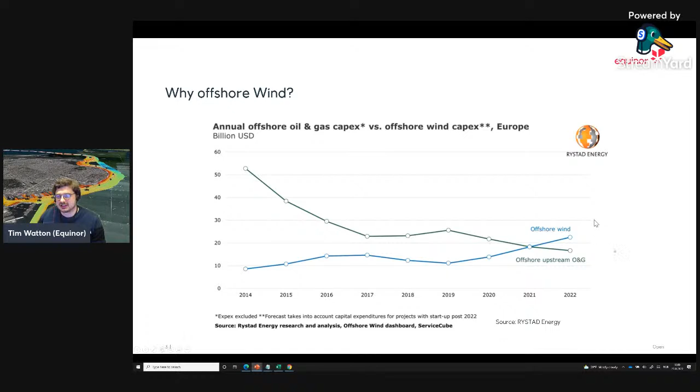So this is the starting point of the talk - starting to see this big increase in offshore wind activity and this big change in investment levels. Equinor's ambitions in all of this, these are all on our website: our ambition by 2030 is to have installed 12 to 16 gigawatts of offshore wind. That is a large amount, and I'll get to why in the rest of the talk.

It also reflects our ambitions towards CO2 sequestration and storage, and shows how we're investing a lot of our R&D expenditure into low carbon, energy efficient resources. I won't speak too much more about the strategic ambition of Equinor - there's a lot to find on our web pages and in the public domain, but I think this is a really strong and very ambitious target, and I can maybe explain why.

I want to make a quick comment on offshore wind in Norway, as this is the theme of this talk in a way. This was actually published in 2011, I believe, and it's evolving at the moment. Offshore wind in Norway is coming - it's a bit behind a few other countries at the moment, but it is coming, and this is on our website. We're teaming up with external and other companies to look at these interesting areas, and there's a lot of focus on this offshore in Norway. It's a little bit behind other parts of the world, but I have quite a few colleagues working on this.

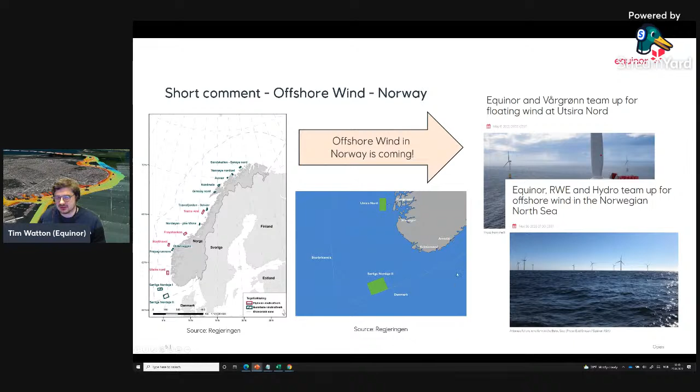Just to remind everyone of the difference between oil and gas and what we're looking at here—this is a very famous image of the Horns Rev wind farm by Ørsted. It's trying to remind people that the main resource here is wind. Wind energy is the primary driver for this, and it dictates lots of things about the wind farm. Unlike oil and gas, a lot of oil and gas companies are looking into wind, but there is a big difference.

The resource is not in the ground, and it's not optimized from the ground. The wind resource is the key driver for everything, and the placement of wind turbines, the selection of wind turbine sites—it's all around this.

This dictates the economics. And it's showing a few nice images of what's called the wake effect for offshore wind—this is where turbines interact with neighboring turbines to reduce the entire energy yield of the site. But this can be mitigated somewhat by different planning, or it's something you need to factor into your cost estimates for a site.

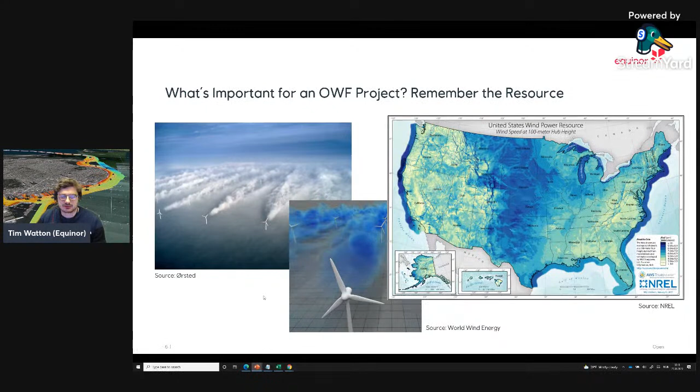So I just want to go through the anatomy of a wind farm. This is probably very basic for people on the call, but maybe good to recap. This is taken from our publicly released information on Empire Wind, the big wind farm in the US that Equinor are developing at the moment with our partners BP. Just using this as an example.

We can split a wind farm into core areas. One is the lease area, and then the development area within this, where we'll position our wind turbine generators, the offshore substation, inter-array cables, and then we have to get this to land—these are the export cables. In Empire Wind there's more than one of them, and each of these cables—there's 2, I believe, in Empire Wind 1, and 3 in Empire Wind 2, to handle the capacity.

And then there's optionality in these routes. Then we have the landfall areas, where we approach the shoreline, and we have to consider different approaches to the shoreline. Then we have the onshore routing to a grid connection somewhere, where we interconnect onto land and into the infrastructure for the US.

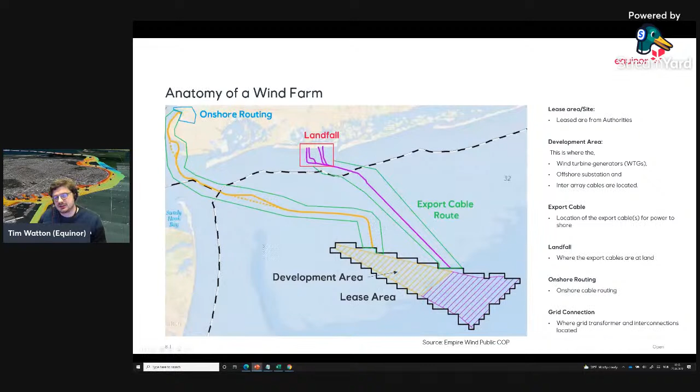All of this offshore area needs to be surveyed, and there are various different tools for that. So, what the surveys input to—it's a bit of a busy slide, but it's just to reiterate the importance of survey here, and what it actually impacts.

Survey is not just to characterize the seabed. It's there to aid the foundation design and installation, the anchoring design and installation, and the installation and design of the inter-array cables—the cables between each turbine. We have to consider the marine archaeological significance of all our sites, and accommodate for seabed movement, so scour protection and seabed mobility. We also have to look for unexploded ordnance to ensure safe and effective operations.

We also have to consider shallow hazards, including shallow faults, boulders, shallow gas in sediment, debris on the seafloor, and the list goes on and on. This is why we perform survey.

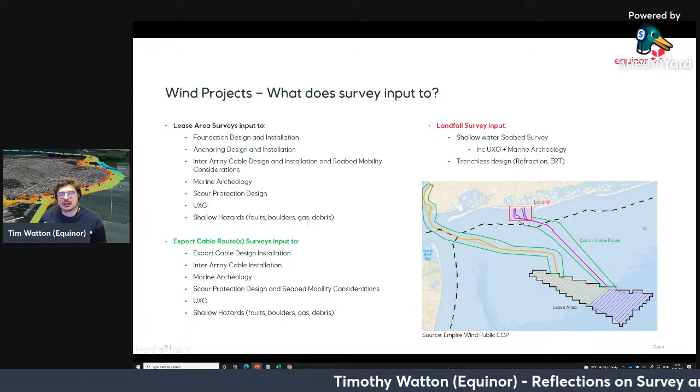This is more or less the same on the export cable routes, with extra considerations maybe on trenching and seabed mobility—so a different focus in terms of the depth of investigation for some surveys. This is maybe the difference between the lease and the export cable routes, in that we're usually trying to image to the base of the foundations, which I'll get to in a minute.

Then on landfall, we do more or less the same kind of shallow seabed survey. However, with what we call trenchless design, this is where we have a horizontal drilled approach to the land, so we're not disturbing or trenching directly onto the shore. We can also consider specialist surveys, say seismic refraction, ERT (electrical resistivity tomography), and various other techniques to aid the design.

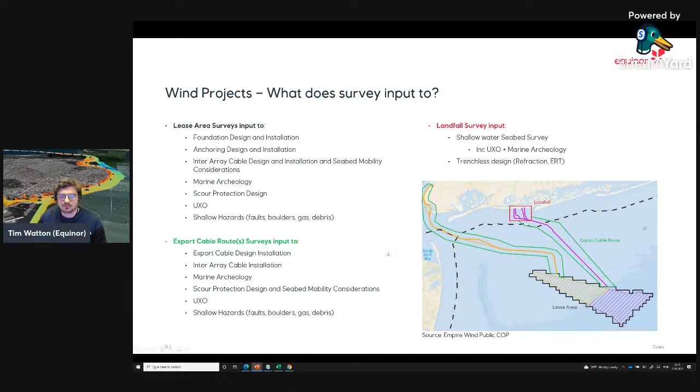I'm mainly focusing on the geophysical side of the survey, and of course this all goes hand in hand with geotechnical surveying to characterize the subsurface conditions as well. Then another busy slide, but just some of the kind of sensors that were relevant for these areas.

Just to cover some of the differences between the two: one is the lease area, having deeper penetration of the subsoil, greater than 10 meters below the foundation embedment depth. This depends project to project.

It can be 50, 60, 70 meters deep, depending on the installed structure and the soil conditions, maybe shallower on occasion as well. But there you need to shoot a seismic, single or ideally multi-channel ultra high-res seismic. And we're seeing more and more use for this, and more specialist uses for this as well. I'll get to some of those.

But we're also seeing the increase in 3D multi-channel seismic to help characterize these sites. And then special techniques along the cable routes for identification of non-magnetic buried targets. And that's becoming very important. I'll come back to that in a bit when I talk more about the export cable routes. So, some of the challenges we face in a lease area.

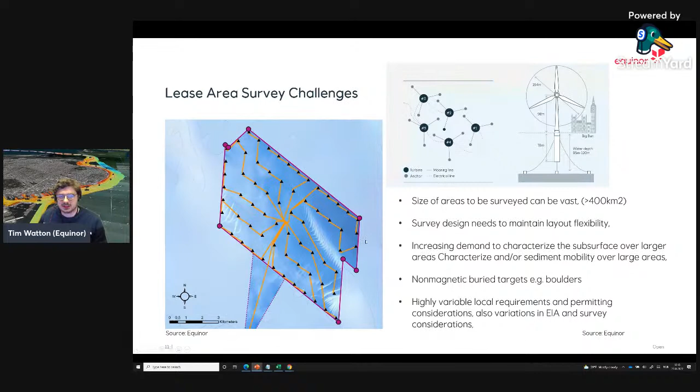And to re-emphasize as well, there's highly variable local requirements depending on where you are in the world. There's a lot of variation in your environmental impact assessment, which all affect your survey considerations. So it's a challenge to plan and optimize a survey in all these areas.

It's a pretty big wind farm, and this is also compared to Johan Sverdrup - the acreage is even bigger than some of the biggest oil and gas fields on the NCS. So it's just showing that these wind farms are big, and also the amount of installed structure on these wind farms is a lot.

It way outstrips anything that's been done on an oil and gas project, because each turbine is more or less spaced at 1 nautical mile apart, say for Beacon Wind. There's over 140 positions just on Beacon Wind 1 alone, and I think nearly 300 on the entire lease that can be selected. And you think about all that infrastructure that's got to be included.

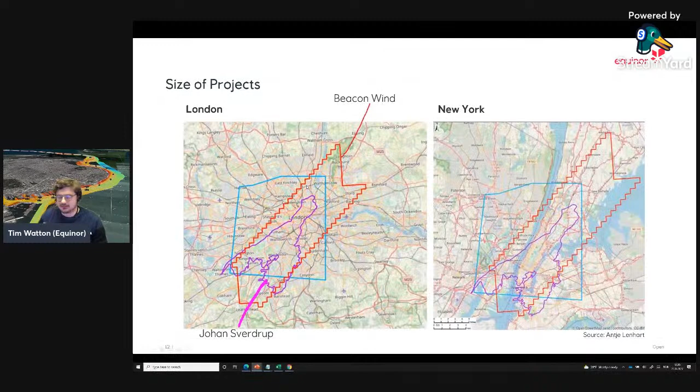And then for an export cable route - I mean, this is maybe the theme of this talk, really - and I'll just conclude with this nice diagram. This is actually looking out over the Empire Wind cable route, or proposed cable route, from the Statue of Liberty. So this is how close we're coming into a very industrialized area, and this causes its own problems. In old industrialized areas, there's extreme numbers of targets in the subsurface.

There's also industrial activity and runoff, which causes really big problems with acoustic blanking, meaning we can only image down to a few meters in some cases in areas where there's basically a lot of sediments that have been contaminated in the area, and we also have to accommodate for understanding and not disturbing those.

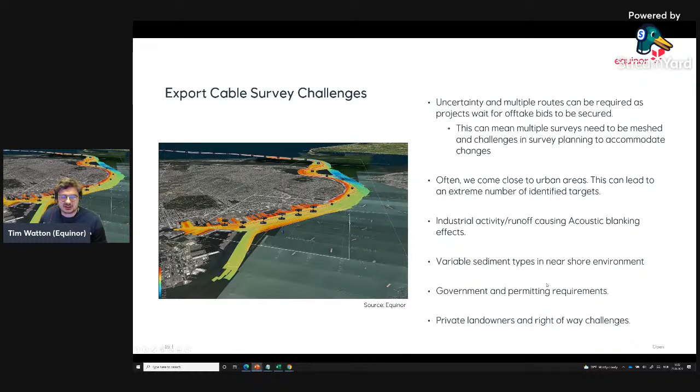We also have these slope stability issues. One thing we're seeing more and more of is problems arising from buried objects that are not easily detectable, like buried boulders, especially in nearshore environments in the northern hemisphere with lots of glacial sediments. Buried boulders become a problem, and different techniques for imaging those are something we want to look at.

I just wanted to comment on one slide about these changes towards ultra high resolution seismic, and why this is becoming more common in the work we do.

It's one of the pieces where I come in to assist a lot of hydrographic surveyors, and why I'll be appealing to a lot of people in geophysics here, is mainly because we're seeing this increased demand for characterization of the subsurface. We just showed how big some of these wind farms can be, and you want to understand the lateral variability of your soil model.

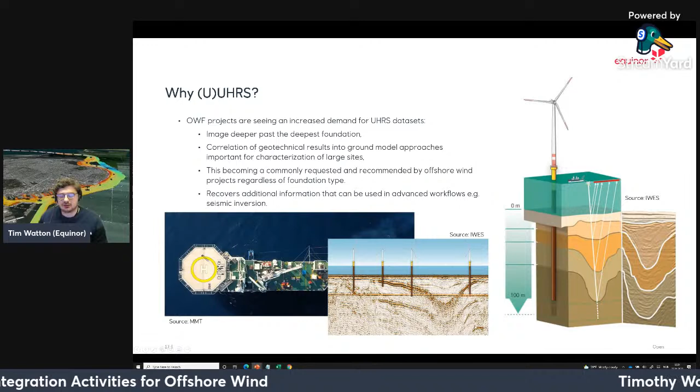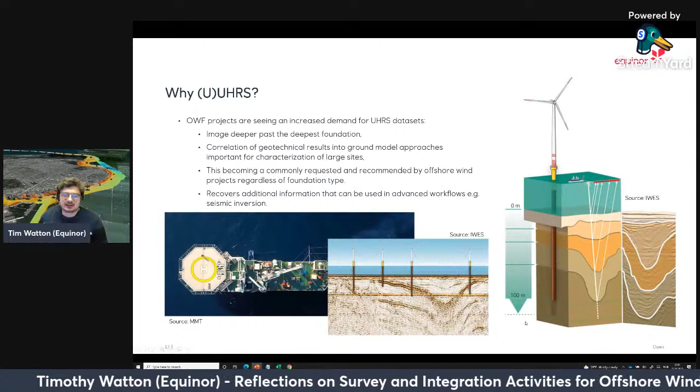If you just take a lot of point samples through geotechnics and you don't understand how they all relate to each other, your estimates can be very, very wrong. This is one of the things becoming more and more common—it's basically the standard now to integrate these geotechnical results with seismic data over large areas.

The seismic data can come in various flavors, and you can also use sub-bottom profilers for anchoring as well. This is just showing an image from IWES Fraunhofer, trying to understand the lateral variability in the soils.

This becomes very important when you're installing very deep monopiles—understanding pile driving and piling capacity, but also the lateral step-out of soil properties away from your turbine site when you're actually installing the structure. It becomes really important to know laterally if you've got a change in, for example, your soil types.

This is just an image here. Coming back on this, it's about the importance of integration, and really reiterating this again for big, large wind farm sites.

Common integration products include alignment charting and various other things. That's great, but we're also starting to develop deep integrated subsurface models that input into foundation concept selection and design. We can build shallow 3D subsurface models to assist with cable burial analysis and various other things.

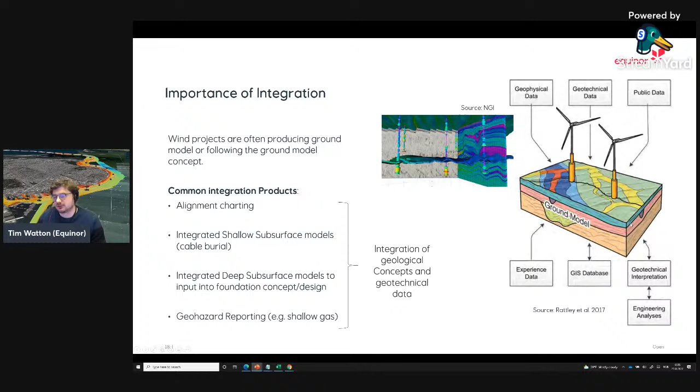This is the kind of work that's ongoing with a lot of people, trying to tie all of these different data sources and experience together in one area, to really understand the complexity of the site, and to plan a safe and effective installation and design for the site, but also for the lifetime of the site.

One thing to also reiterate is just how big a data challenge we have in big projects like this, and everyone is starting to face now. We have our responsibility to our partners, our responsibility to our joint ventures, our responsibility to the government and the government regulations and their data requirements, which are different in all different countries.

We have our own data standards and archiving, with inbound contractor data deliveries and outbound to all of our engineering contractors. Managing this is no insubstantial task for a large wind farm. There's over 27 surveys plus that make up Empire Wind, hundreds of reports, thousands of folders, hundreds of thousands of files. That becomes a big data management challenge we want to effectively manage, giving the right information to the right people at the right time, and that's something we're working on quite a lot now.

To conclude, there are many projects coming up globally, and the challenge is that a lot of new countries are opening up for offshore wind. The regulations and regulatory bodies are still being set up in many countries, and they're still finding their feet with what they need to request from data, from us, for a large infrastructure project. I think this is affecting everyone in the industry at the moment, where we spend a lot of time both internally and externally trying to understand changes in regulations.

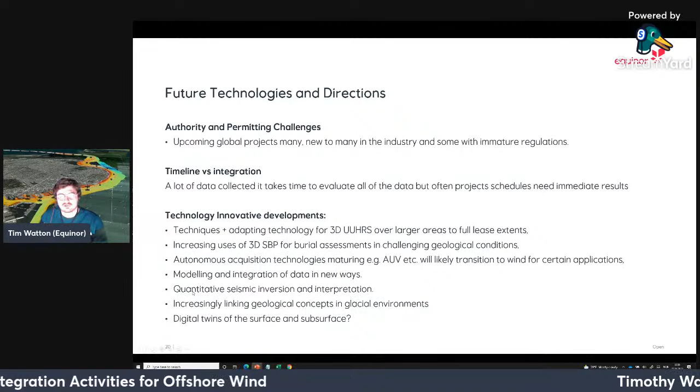I think we'll see a lot more autonomy, especially in the industry, with techniques pioneered in oil and gas starting to migrate more and more to offshore wind applications. Some things I think will become more relevant are using seismic data in new and novel ways, pioneered by many people as a strength of the oil and gas industry—quantitative seismic inversion and interpretation to be predictive about soil properties and how they will affect foundations. I think all this modeling and integration work is going to come to the forefront in the next few years. The question is whether the ultimate aim is to have a digital twin of the surface and subsurface for our wind farm, like we would have for our engineered structure. I think that could be the way forward for all this.

So with that, thanks for listening to me waffle on about offshore wind, and I hope that gave you a bit of an introduction to some of the challenges we're facing and some of the background on offshore wind. Tim, thank you very much.

That was very interesting. I've got a number of questions for you personally, and a couple that have come in from Discord. To me, I can see only a greater involvement from survey for this compared to maybe the historical use in oil and gas energy. Is that fair to say? Do you feel that survey has a greater role to play in the years to come in wind, from an acquisition point of view, processing, reporting, and GIS management of data?

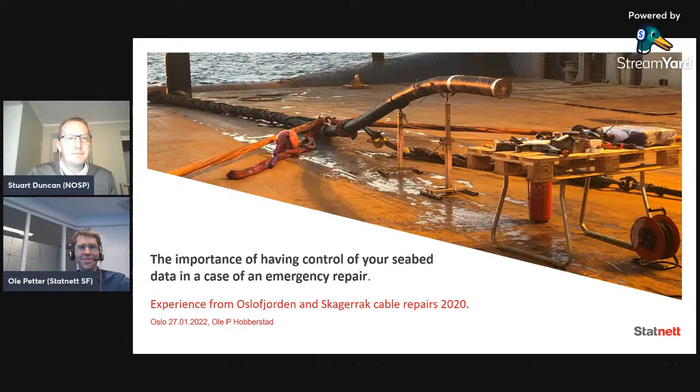It's a big topic, and it will align bits and pieces of it with the previous presentation, and I'll go into the details when this happens, and you have a need to repair the cable, and the importance of having control of your seabed data, and how valuable it is. So I'll give some examples here from the Oslo Fjord and the Skagerrak cable repairs from 2020. We had 3 incidents in 2020, and a lot of experience gained from that, worth sharing with you.

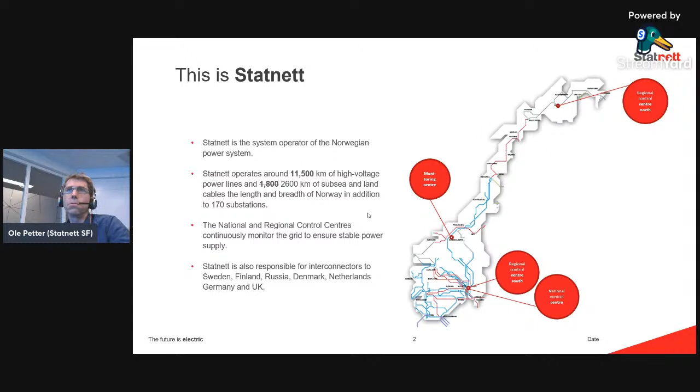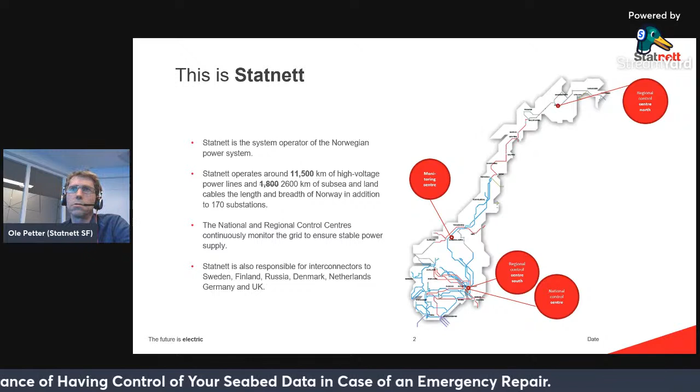Quick introduction - Statnett is the transmission system operator in Norway, and we are responsible for the main network on land, and also the interconnectors offshore, which I'll keep my focus on here, and also the inshore cables, about 2,600 kilometers in total of subsea cable, and connections to all our neighbors - Sweden, Finland, Russia, Denmark, Netherlands, Germany, and UK.

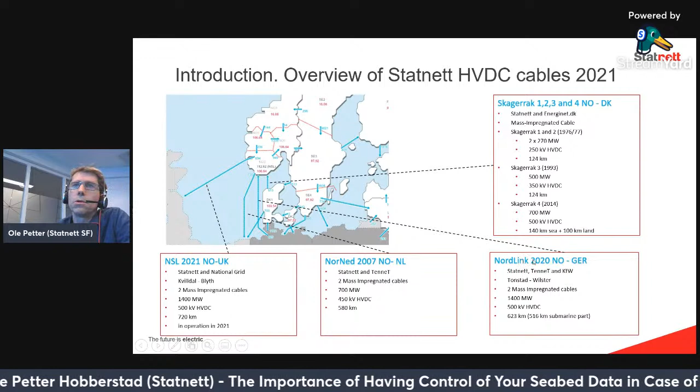The Nordlink was installed recently in 2020, and the NSL is still on trial, installed last year, doubling the capacity of export. We'll look into what happens and how we deal with it when these cables break.

There are different types of cables. We have oil-filled or self-contained fluid cables, where you have the oil in the middle here in the core. Then you have these PEX cables, where the insulation is this PEX material. And then you have the mass impregnated cables, which are mass impregnated non-drainage, and usually have the paper insulation filled with oil. Those are the normal for Statnett in the long interconnectors.

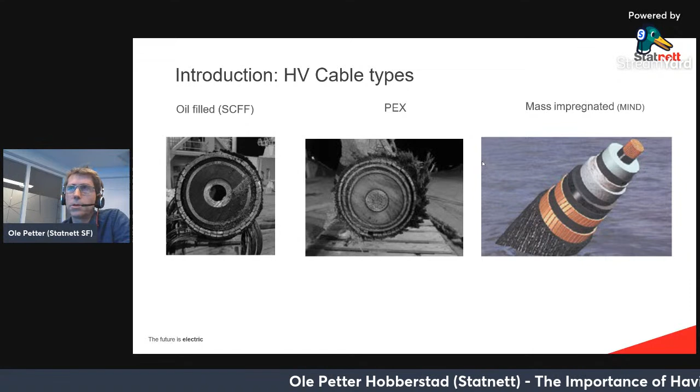The MIND type is used for the long interconnectors, and for the inshore HV AC cables we have either these oil-filled or these PEX cables. So the mass impregnated is also the DC cable - that's a difference. The long interconnectors have DC since the loss of power is higher in AC. We'll come back to this, because on the Oslofjord cable we had a fault on both this and this type of cable, and on the Skagerrak we had a fault on this type of cable. There are some differences we need to go into.

When the fault happens, a lot of questions arise, and I work in the emergency response team. When did it happen? Where is the fault? Why did it happen? And where is the cable? Do you know where the cable is? Sometimes, especially on the old cables, there are uncertainties. And what's the seabed condition like at the site where you have the fault? That's very important to know, and also shown in the previous presentation.

So when you try to find all the answers to these questions, you need to compile the information, and that's what I'm going to show you - bits and pieces of how we give answers to some of these questions, and how we work to get them. We had 3 faults in 2020, and we'll have a quick look.

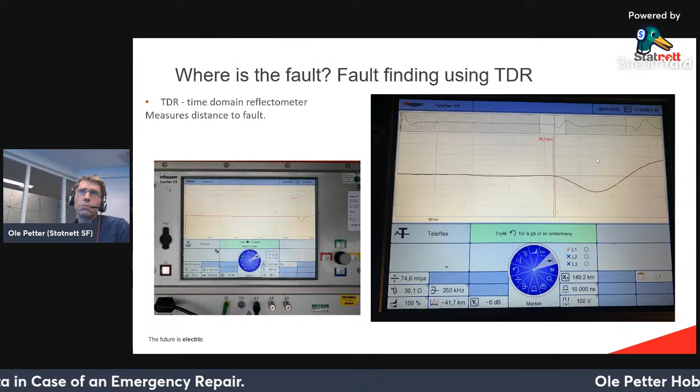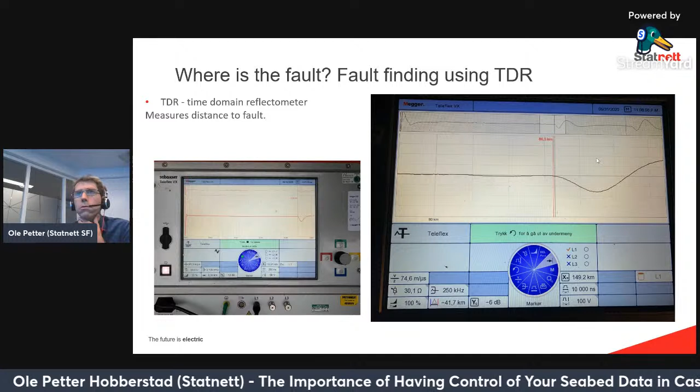So the first question is, where is the fault? As mentioned by Stuart, with the incident in Tonga - it's not very difficult really. You send a pulse down the cable and measure the distance to the fault. But how do you know it's the fault? There are different types of fault. You can have a low ohmic or high ohmic. Normally we have a low ohmic, where you have a breakthrough, or at least

you get an earth connection, and you can see a change in impedance, very much similar to a sub-bottom profile really, where you put the pulse down and get a reflection where there's a change in impedance. You need to know the velocity of the pulse - that's what gives you the distance. So if you have the velocity wrong, you will also get the distance wrong. But you have some measures and reference points you can align to - for instance, you should have a good idea of how long the cable is in total, and if you have some joints, you can use them as reference points.

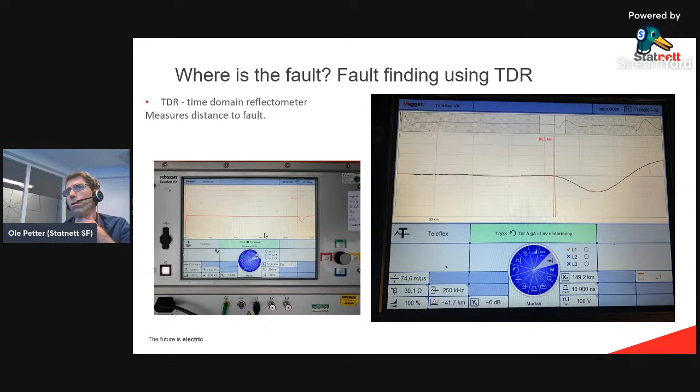So this is the speed set here, and this is from the fault on the Skagerrak cable, and this is from the fault on the Oslofjord cable. That's the time domain reflectometer, and that gives us our reading. We also have other ways when you have fiber optics, and in the Oslofjord cable we have fiber optics, which is more accurate than the TDR measurements from measuring the pulse. On the fiber optic, you get the exact measure to the meter.

So let's move on to the good stuff. This is our damage 16, in February 2020, and this is Oslofjord cables. A big tanker had drifted off from this refinery area and got over our cables, where some of them are PEX and some are oil. What happens to the oil cable is that when it's ripped off, it starts leaking oil, and that's the priority, to stop the leakage. We need to pump oil into the cable to prevent water ingress, which makes it quite urgent for us to get that fixed.

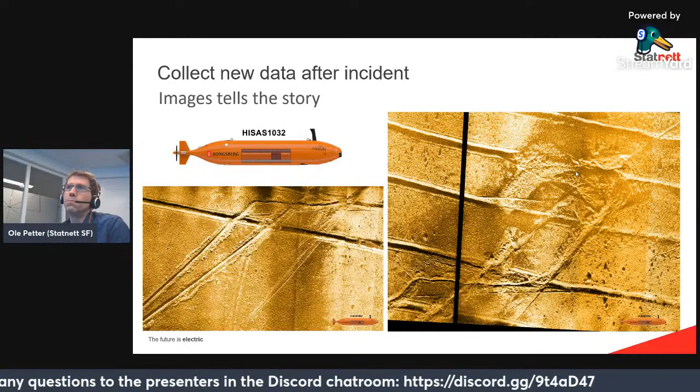We could see the cable had been broken off here. This is a cable that's been dragged southwards, and we had cables that's been dragged northwards and southwards. So we could see that it's cable mayhem, or whatever you call it, but that made us prepare, and it could also narrow down our search when we get to the site with the big vessels. So we could start detailed planning straight away based on these data.

And the cable number 6 here was the most crucial one, and we needed to find the oil leak. It might look simple when you look at this, but when you get out there with the ROV, it's muddy - the site has almost no visibility, and it's hard to navigate. So when you have this as a background image on your nav screen and you line everything up, it makes such a big difference compared to if you didn't have it. It just made our life a lot easier.

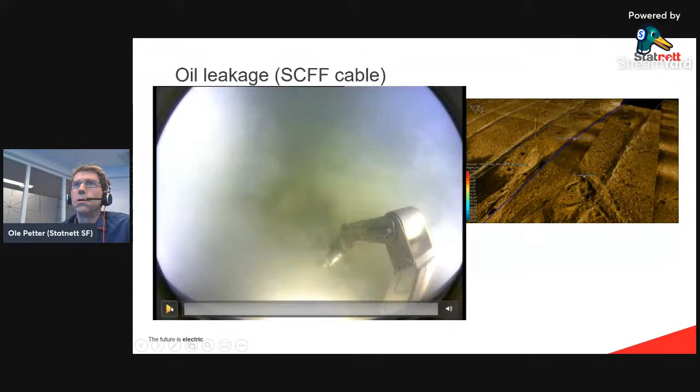And on the nav screen, we could put this on the background. We did the inspection just when we arrived out, looking for the oil leak, and we didn't see anything at first. But we could navigate, and suddenly we could see some oil droplets - I'll show you how it looks. In the media, it looked like a lot of oil was coming out, but when you get out there, it's not so much. This is the oil coming out from the seabed, and the cable is down there. So that's what we needed to get to, get to the deck, and sort out.

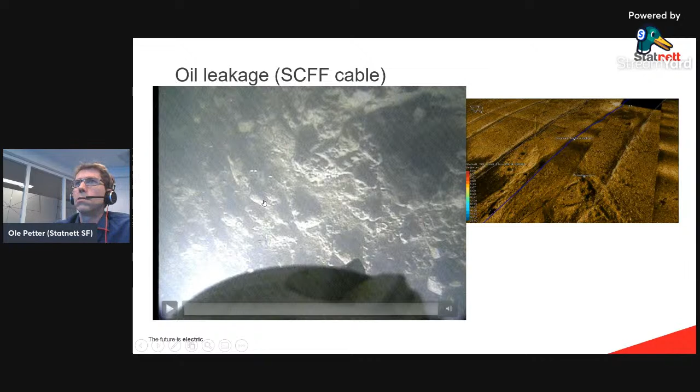So when we were looking for the oil, this is what we needed to find out, and luckily we could find it quite fast based on these HISAS data.

So the timeline for the fault: Sunday the 16th we got the report. We have a call-off agreement with the PRSI, the Pipeline Repair and Subsea Intervention - they could allocate vessel Olympic Zeus, this one. Monday we had the Hugin maps available, so we could understand the situation better. On Wednesday, 4 days after, we arrived at Nexans port and completed the mob the same day. We could transit to the site and start inspection.

We found the oil leakage, started to dig out, got the cable on the deck, and we got all that done in 5 days, which was quite hectic days to get everything ready. So a quite exhausting process, but it worked, and this is what we got on deck. This is the oil cable, and you can see how it's imploded - the cable, which is hollow, has just imploded and narrowed down into this.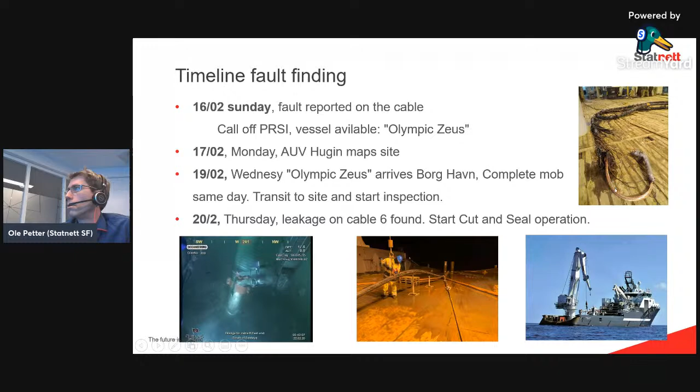So that was for the Oslofjord cable. It's a long story, but I'll just keep to the first phases on the repair. Maybe we can take another time or another presentation.

For the Skagerrak cable damage, it's a different seabed. The damage was from trawling, and from the TDR measurements we could estimate the position out there, which we know is a difficult area. We have these extremely large sand waves that are moving and make exposures to our cable and make it vulnerable to the trawling activities that take place.

Luckily, we had the North Sea Link project coming up there with Nexans going out for the installation, and we had that vessel coming out here to do the survey on these sites before it was heading for North Sea Link. We also had some other equipment on board to do the tracking of the cable.

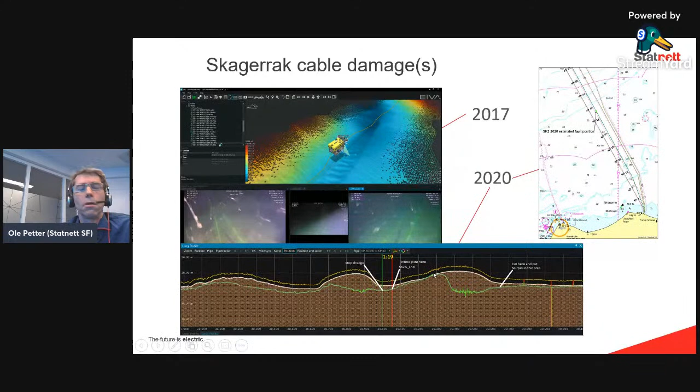So yeah, my time is running out. So how we did it: tracking the cable, put a tone to the cable, tested some equipment, and we see that when you put a tone, we can measure the cable all the way down to 6 meters, which is a good development.

And we tested 2 different tracker tools, and some will be presented at Geilo as well I think, so that's a commercial for the Geilo presentation that's coming up, usually at 22 hertz. And here you can see it's 3.5 meters down. Just an example of how it's visualized and how we prepare to do the cut.

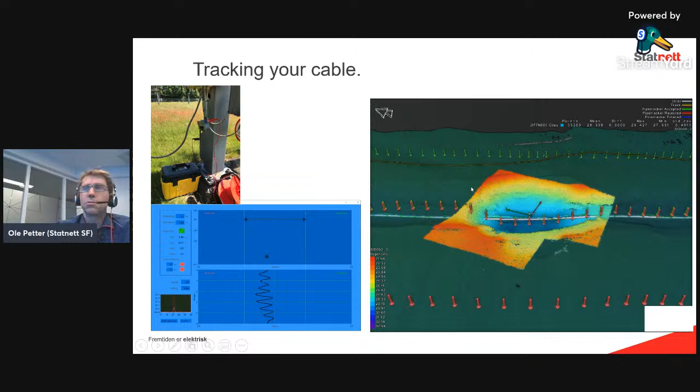It's a big topic. I could talk on this for a long time, but that's my time. So thank you, just some bullet points: when you have access to the data, you can make early decisions. I recommend acquiring new data when you have a repair if possible, and not only base it on your as-is data. Maps and images are very good to have, and it's easier to show and explain rather than just in writing. And when you have it, it's better risk management, and in the end, what management likes to hear, it saves cost.

Special thanks to Kongsberg Maritime, Nexans, iSurvey, and Aquadyne that was involved in very much of this seabed work.

Yep, thank you, thank you very much, Ole. Very interesting. I always find it funny that people take for granted the fact that they can use their mobile phones and have power, but they don't realize that all this is buried cables under the rivers, estuaries, and the ocean. And it was only recently with the Tonga incident that it was thrown into the limelight, especially with the fact that I remember reading it would take a month for the vessel to get there to repair that cable.

You were able to mobilize at short notice, but again, it's good planning and proper management of data. So you mentioned something called a PRSI, which if I remember correctly is pipeline repair and subsea intervention. That's obviously what they're going to have to do in Tonga, using the same principle I assume with you in Oslo Fjord. Can you explain a little bit about that, how does that work?

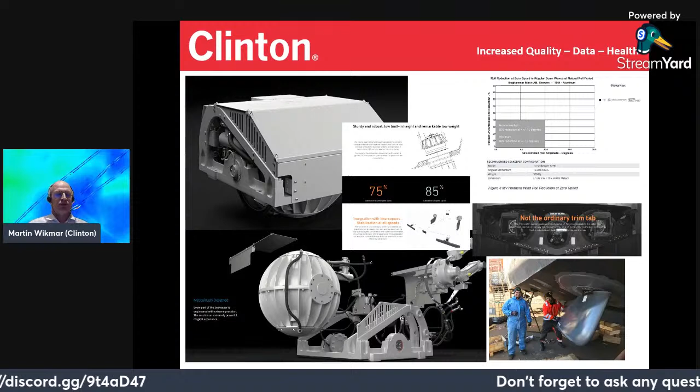We mounted it on our new vessel, Northern Storm. That one takes away about 85% of the roll and lowers fuel consumption around 10%. It also gives a difference if you live on board the vessel and it rolls around versus being completely flat. And since we are working with acoustics, if the vessel is stable instead of rolling around, the data quality will be better.

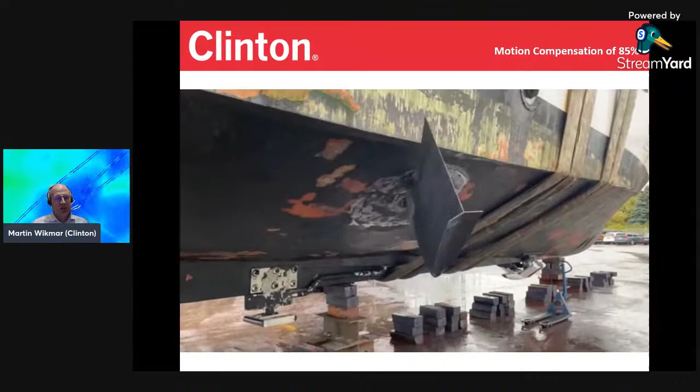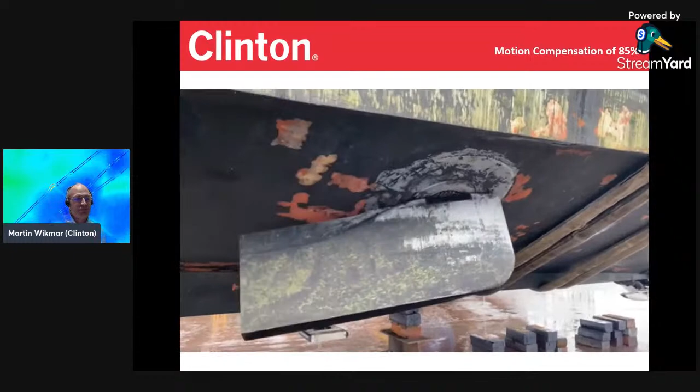So this is the Humphree system on board the vessel. This one is moving around every second, 24/7, making the vessel stay still. You can see the size of it - it's 2 meters, with one on the other side.

That's one of the key factors for our vessel. If you make the vessel stable, you control the multi-beam, the sub-bottom which is mounted on the vessel, and the USBL, which stays still instead of moving. Then the quality will be so much better.

The other thing is to have a multi-beam with really high resolution. We have the EM 2040 from Kongsberg on board our vessels, operating at 200 to 400 kilohertz. Then we use EIVA, as I mentioned before, as our single program to work on the multi-beam data.

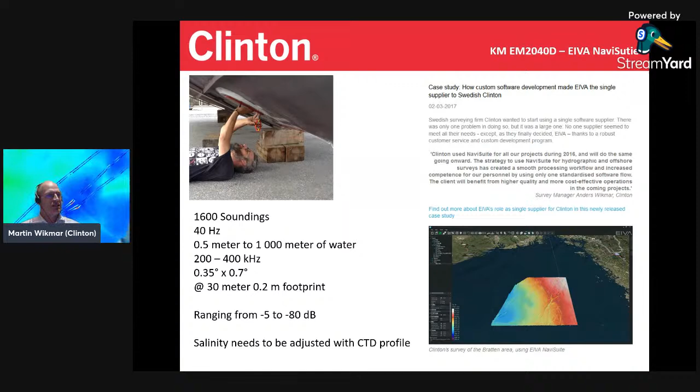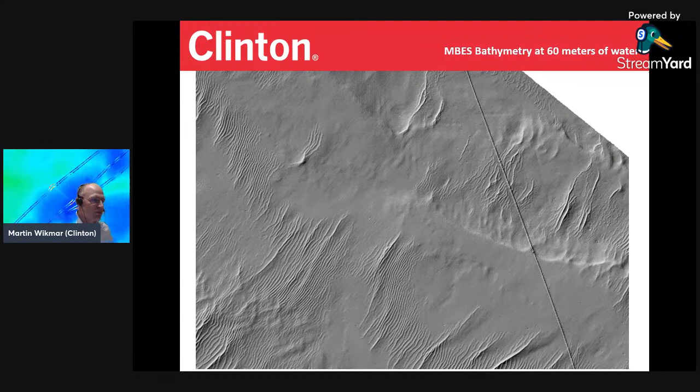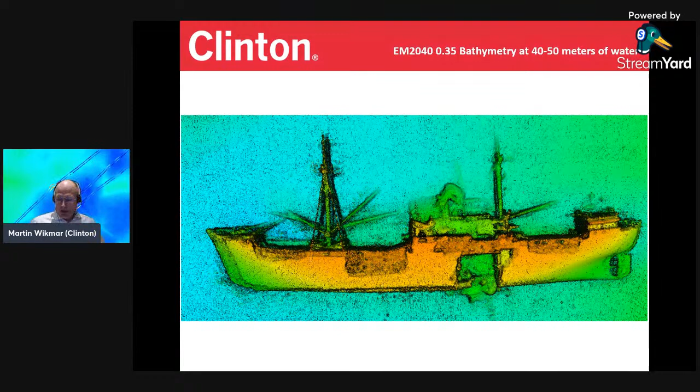You can also survey a vessel with the EM 2040 at 40 to 50 meters of water, and survey at 10 knots at 40 meters of water to track a cable on 40 meters of water.

You can also run a cable tracking survey at 10 knots at 50 meters of water, and also run at 10 knots at 100 meters. Then you start to lose resolution, of course. So somewhere between 70 to 100 meters, we start losing resolution in the sense that you can't deliver a 10 to 25 centimeter grid size.

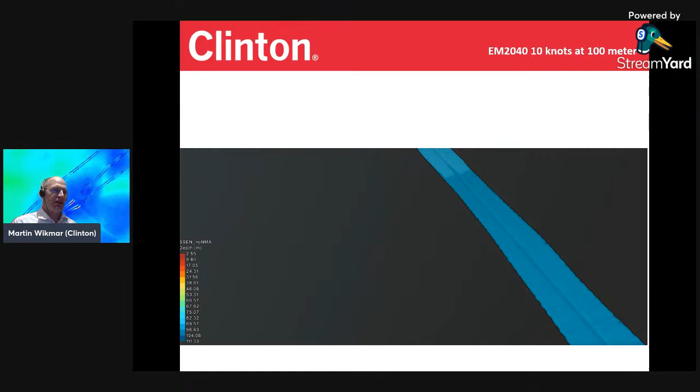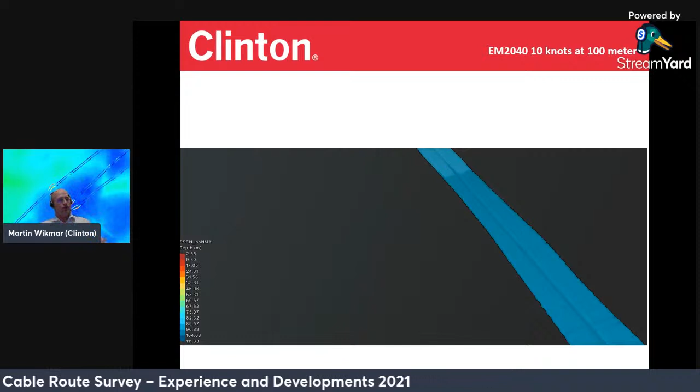But it's a major difference to just go out and do multi-beam surveys and try to stabilize the vessel, instead of using a motion compensation unit to compensate for the motion on the vessel. We are trying to make the vessel still, and when you fire down the multi-beam, if it's stable, you get so much better data. That's one of the major key factors - we can go quite fast with really high resolution, and you can't do that without the stabilization systems.

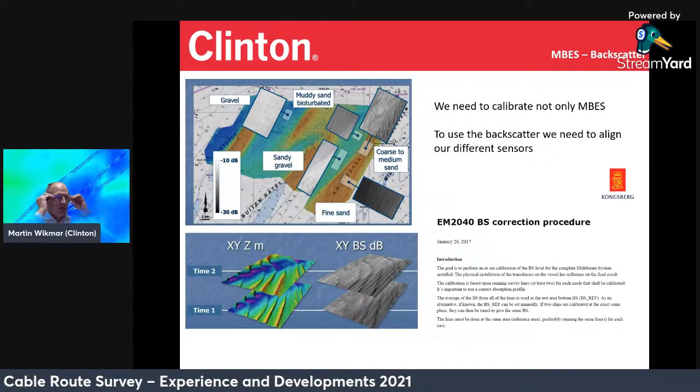The other thing is, if you have a really good installation on the vessel with a hull-mounted system, then you can use backscatter, and backscatter needs to be calibrated. It's not just about taking out the data and giving it away - we need to calibrate the multi-beam, which is something everybody does.

But what you really need to do, if you're not already doing it, is calibrate the backscatter. If you calibrate the backscatter, you align the different RX and TX transducers to be the same, which means you get rid of the striping effect that can appear in the data from the system. There's a really good backscatter correction procedure released by Kongsberg, so if you haven't done that, do it. And then, if you are running backscatter, you need to do a lot of settings that you don't normally use when running multi-beam.

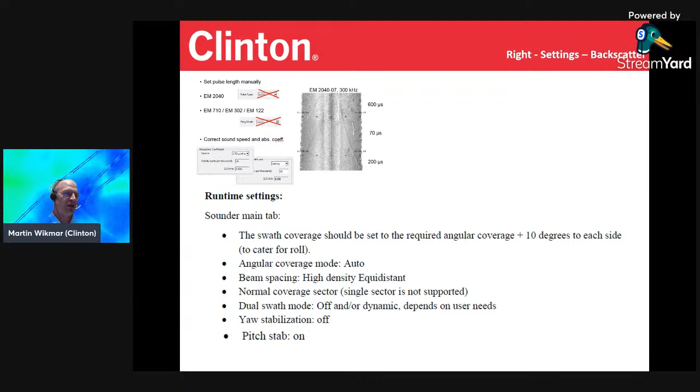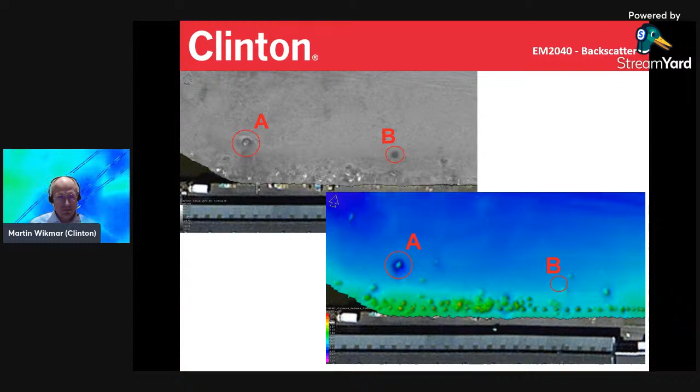The other thing is, of course, that you can pick out the objects. So here's the multi-beam X, Y, Z data, and here's the target again, once again in decibel, which means you can drag out the target here and then the target here, giving you two images or two objects from the same feature, which gives you confidence that there is some feature there. And the good thing with backscatter is that you don't have any positioning issues like with USBL and so on - it's a hull-mounted system, so there's no double features or so on.

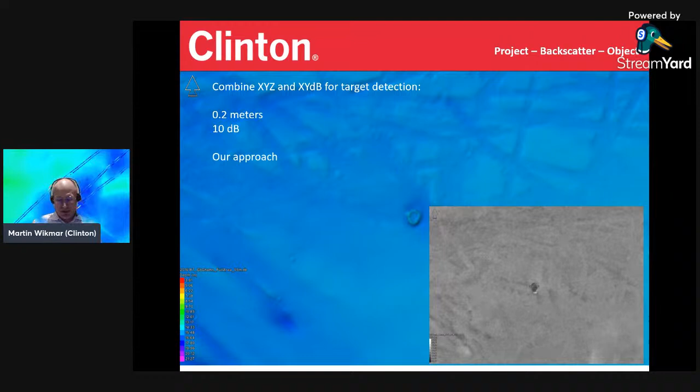You can also then use it for - this is multi-beam for normal XYZ data, and this is from the backscatter image. So you can see that you are getting more information here than you can see on the multi-beam, but you get more information from the backscatter.

You can also use it - this is an automatic tool from FME then. So what you can get here is the different types of geology in the area. The good thing here, if you use traditional side scanner, this is backscatter, you can set the level here to 10 dB, and then you start to get the contours, but that's done automatically - it's not done by hand.

So it's quite easy to drag out different types of sediment in large areas. And then, of course, I will show you later on, when you go down on the site - on the wind farm site, or in the geophysical route survey site, or wherever you go down - then you take samples. You can use this information to enhance your product and enhance the digital model of the geology features that you see on the seafloor.

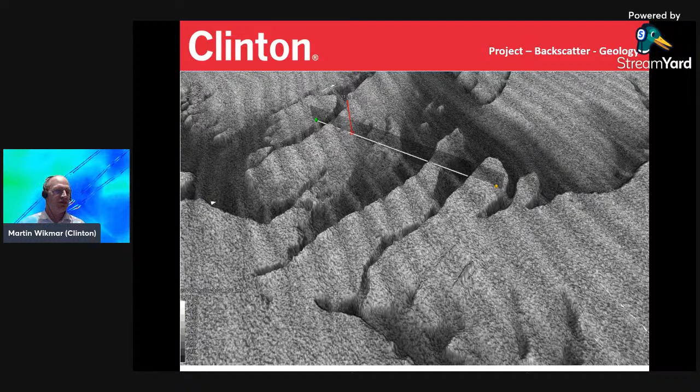And if you then take everything that we have discussed, this is sort of a backscatter image that you can get out. So this is 50 meters of water up to 0 on the side.

So what you see here is that if you go in with the cable, up here you see some water lines, some pipeline. Here is the water inlet coming in, and here's some geological feature. This is the EM 2040 at 0.335.

A stable vessel with good dimensional control, and in the end you can get a really nice backscatter image, which becomes a mosaic you go around in with no striping and no double targets. It's quite a neat feature.

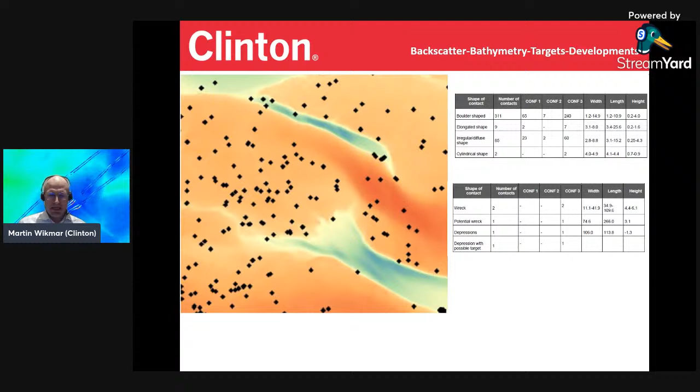What you can then also use for the bathymetry and backscatter is that you can build a list, both from the bathymetry and the backscatter, then get out targets and export it quite easily, taking out redundant targets. It's a really cool feature to use information from multi-beam and backscatter together to discriminate your targets.

And of course, in areas like when you're building a wind farm, if you have something like this image here with all the boulders, it's so good to be able to use a tool combining backscatter and multi-beam, and then pull out these 50,000 boulders in the area instead of picking them manually. It's a really smart feature.

As I told you before, if you use the backscatter to derive the model, in the first case bedrock is from 0 to 6.5 decibel, gravel is from 6.5 to 14 decibel, and 14 to 22 is coarse sand, and so forth. Then you do sampling in the area to enhance the model, which might reveal there was no gravel from 6.5 to 14 — it's rather 6.5 to 18.

Then you just click the button, and suddenly you have a new model of a large survey site, instead of throwing it away and starting again with all the digging. That saves a lot of time in all our projects. And as Tim was talking about, maintaining all the data sets is quite tricky if it's not smart and convenient to handle.

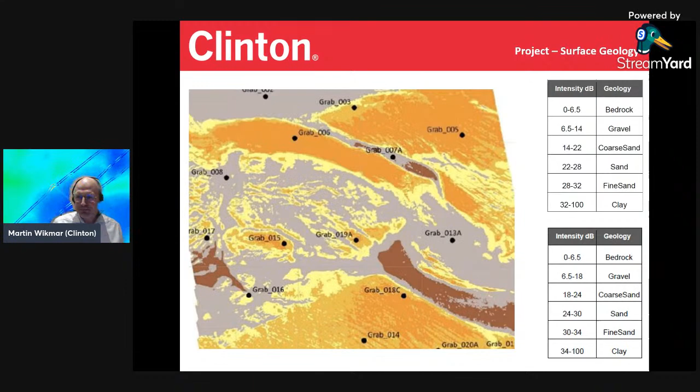The other thing, as we talked about with the URS and so on, we use the Innomar Medium in all our projects. It's used in the major wind farm areas in Europe.

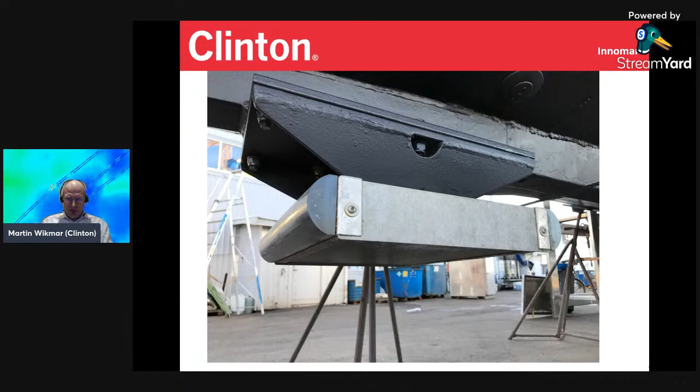The smart thing with our Innomar system is that it's stable — we take away the roll, so it fires straight down. It's a massive system with a big cabinet. The good thing is it has a footprint of 3.5%, meaning when you fire it down to the ground, the footprint on your soil and down in the sediment is really, really narrow.

So you can take away some of the areas we used to need to work from — you don't need a URS anymore because we have so much information anyway. The Innomar Medium is used as the single tool in most of our projects, combining both the normal sub-bottom and URS. Of course, if you'd really like something else there's a good option to use, but for this large scale mapping, and for real detail as I'll show later, the Innomar Medium is the kit.

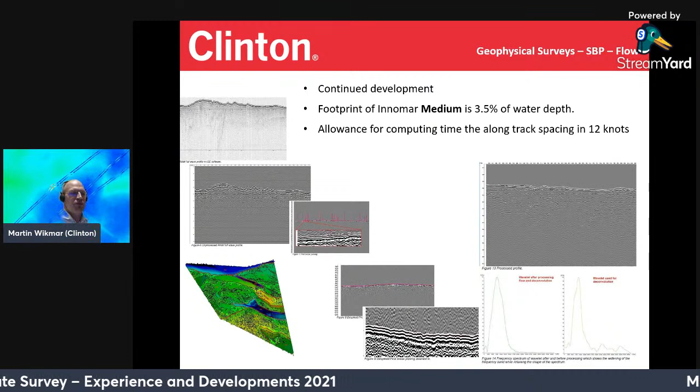And of course, we can do 12 knots whilst doing this. So instead of going 4 knots backwards and forwards with a lot of weather, we do 12 knots and survey everything 3 times faster than a normal survey setup.

What you can then get is down to about 20 meters penetration in sand, because that has been the trick before — sand has been hard to penetrate with sub-bottom systems. But the Innomar Medium down in the North Sea goes down to 20 meters in sand.

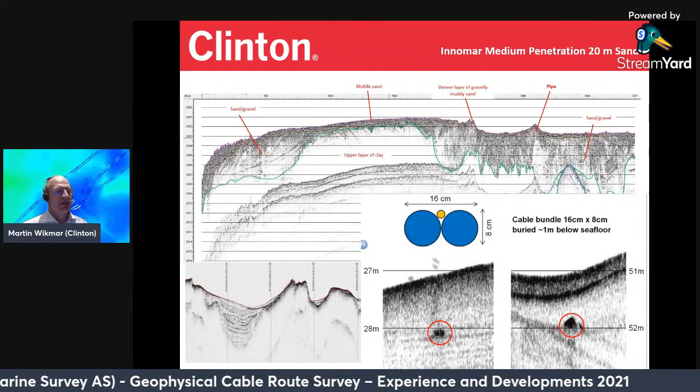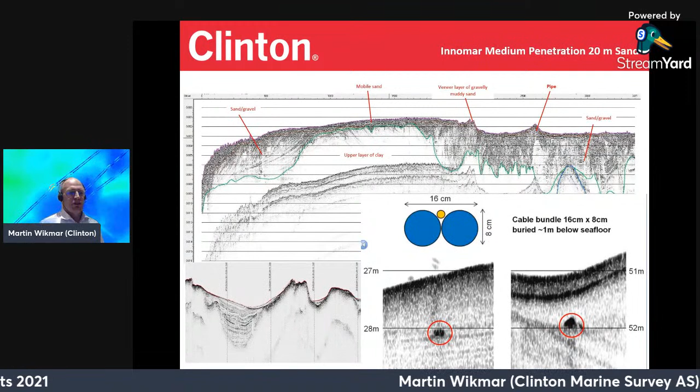The good thing is you can also use it, as you can see on the screen here, for tracking cables — not going straight over them, but pinpointing them. You can see there's 52 meters of water, then 28 meters of water, and you go down 1 meter at this stage.

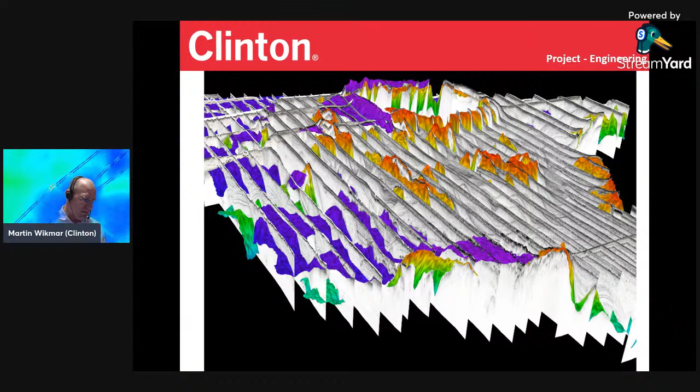So this is of course a major thing. And what we can do then is to start to build a model of the soil instead of small sectors. We can run a lot of these lines really fast, which means you can use this sort of model to model the sand, or the bedrock, or the clay, and then get the thickness of the clay in certain areas and so on. And of course it becomes quite smart when you are using larger or small areas where you're supposed to know what's in there.

And when you're planning major larger wind farms, or cable routes and so on, what you see here is the bedrock gridded, and that goes through the sub-bottom, which has been running, as you can see, a lot of lines, but then also a couple of cross lines to make sure we have it.

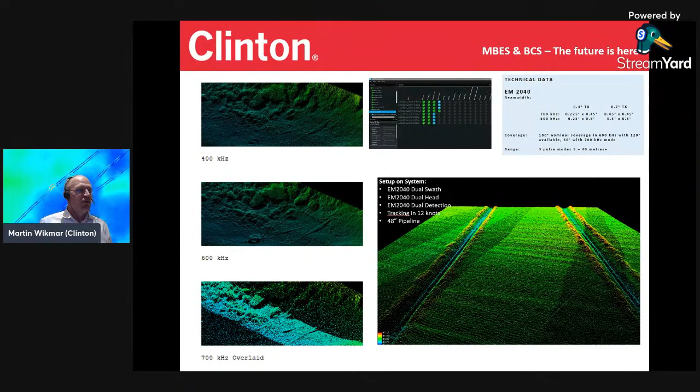But there are, of course, things that you need. If it's deeper than 70 to 100 meters, then of course an AUV solution with an EdgeTech 900 kilohertz side scanner is really nice to use, so to say.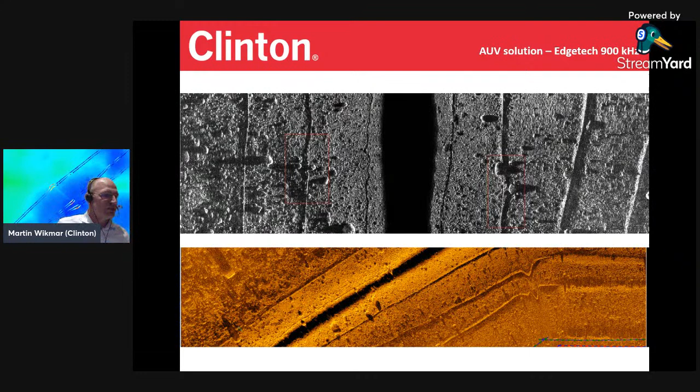So to summarize - I had to go really fast because it was 35 slides - but to summarize, you really need to make sure to have the right dimensional control if you're using hull-mounted systems for your surveys, to go over known features so you know you're right, and make sure to use the right software for processing, like we are using EIVA.

And then, of course, we can use mosaics in 1x1 or 10 centimeter resolution instead of having a striped side scanner image. Positioning is improved with hull-mounted systems, automated target picking, using both multi-beam and backscatter. You can deliver 10 centimeter beam to 70 meters of water if you do it the right way.

Of course, if you don't do dimensional control, don't stabilize your vessel, don't have the right echo sounder, that's not possible. But if you do that, that's the future. And of course we can use it to acquire data at high speed. We only have 5 people on board, or 4, so there's less HSE concern in that respect, since there aren't a lot of people involved.

We don't tow equipment if it's deeper than 70 meters - we do use a winch as well then. As I told you before, there's less processing time because we're using backscatter, and we have less involved personnel, so there are no handovers. And backscatter is used for surface geology.

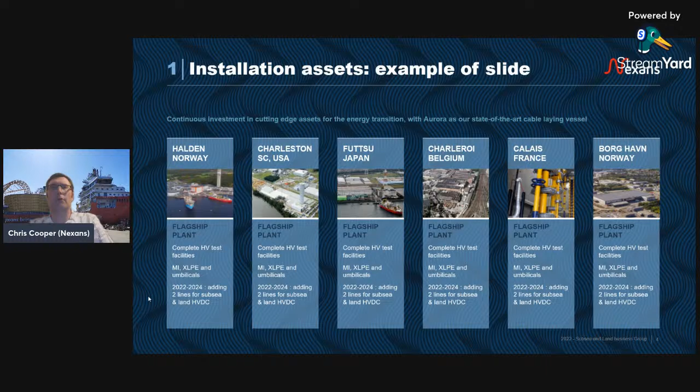We have several factories around the world. Nexans is a worldwide business. The three on the left, the one in Halden, is maybe our main subsea cable factory. We've just opened a factory in Charleston, USA, pointing towards the American market, and we also have one in Futtsu, Japan. That's where we produce our cables and deliver them worldwide.

We produce cables, but we're really focusing on becoming a one-stop provider, and installation has been a thing at Nexans since very early days. We currently have two cable lay vessels where this technology I'm going to talk about will be used. The Nexans Aurora came into service this year, a brand new vessel - very proud of her - and the Nexans Skagerrak, which has been around for donkey's years but still does a good job. We've got a barge that we can fit with thrusters and give DP capability, and right now we've got one trenching support vessel chartered to bury the cables after installation.

So the problem, or what we need, is basically to record the angle of the cable as it leaves the cable lay vessel. This is basically to give us what's really a backup to our catenary calculation. Primarily that's done by the ROV, which is at the touchdown point - the position of the ROV is kept directly above the touchdown point of the cable. We then calculate the catenary, which will give us the tension and allow us to lay the cable at the right position and at the right tension. But as a backup to this, we've always used some kind of angle measurement on departure.

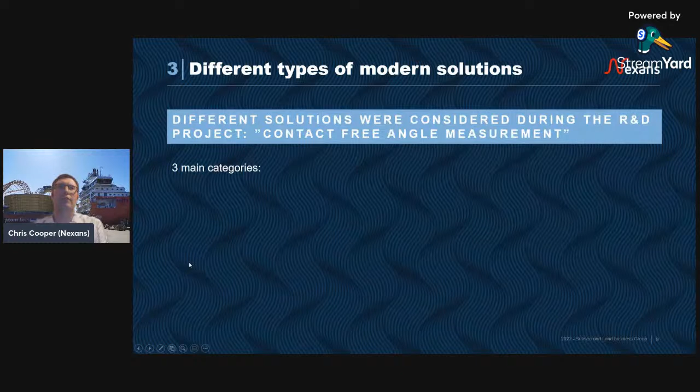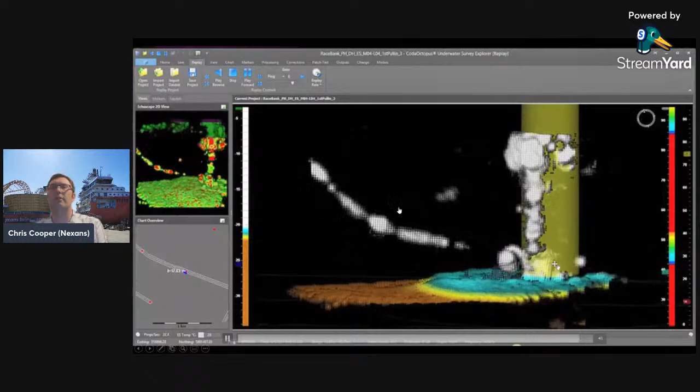We looked at the acoustic devices on the market - ECE, Coda Octopus, and Kongsberg actually started looking at a solution for us. Coda Octopus, this is their data from their website. Basically, here you can see the white is an inter-array cable being pulled into a wind farm monopile. Obviously, this could have been used to pick points on the cable to give us the angle higher up in the water column. So certainly it looked interesting.

But then we also looked into vision technology. We went to Fugro for that because we'd seen some good presentations with them, and they seemed to have a solution that might work for us. And in the end, we also looked at using laser technology.

So why did we decide to go the way we did with laser? When we looked at acoustic, it's difficult to achieve the correct angle. The video you just saw was basically shot from a chase vessel, looking across at the cable, whereas we would want to be mounting this on our own vessel, not to have the extra problems created by a chase boat, and also it's a more robust solution. We also looked at where we're operating - we lay cable from the rear of the vessel, which is also where the thrusters are, so the acoustic environment at the rear of the vessel is not very good for an acoustic device.

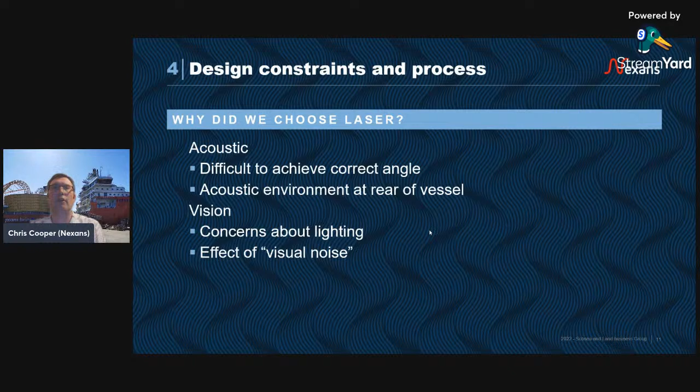When we looked at the vision technology, we were worried that we wouldn't be able to maintain the correct amount of light on the area, especially as it would be shining back towards the operations bridge on Aurora. So that might give us some problems, but generally it's about maintaining the correct level of light for this technology to work. And then there's the problem of visual noise - our cables have stripes on them for easy identification subsea, and then there's also rain, snow, hail that could interfere with that solution.

So when we looked at laser, we saw that it was more widely used in both subsea and above sea level areas, so that was good. But what it came down to, as normal, was that laser was a much cheaper solution than both subsea acoustic and vision, and we also saw there was less development needed than with the vision technology to bring it exactly how we wanted it to work.

So, having decided roughly the way we wanted to go, we then looked for a partner. This is very far from Nexans' core business of producing subsea cables, or all sorts of cables, so we didn't want to look at making this in-house. We needed to find someone who had experience with hardware, software, and machine learning. And to that end, we ended up with EIVA, who've given me a bit of help with the presentation this evening - so if you have any difficult questions, I saw Ola was in the chat, ask him, not me.

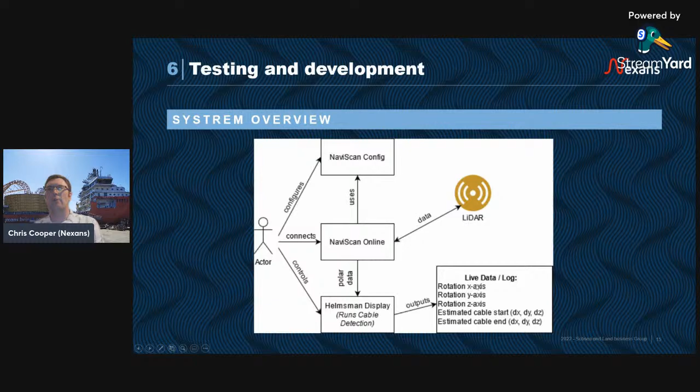So EIVA took the ball, and those that know EIVA software may recognise some of the boxes here. The key thing is that the data is collected by one software, which is then configured, and then it's outputted to the helmsman's display, where the actual clever stuff happens, giving us the outputs to do our calculations.

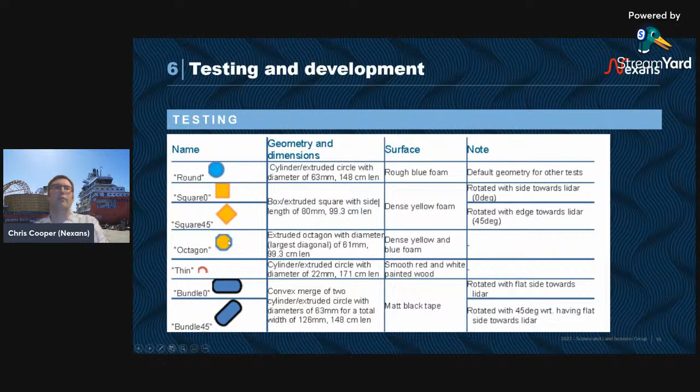They started testing the lasers using different types of medium to see how the laser and the algorithms reacted to different shapes and sizes. So you can see they did quite a thorough test plan here of different things to see how they worked.

There were also some software issues that were sorted out in terms of processing, and this basically gave us a good start to work towards the final product.

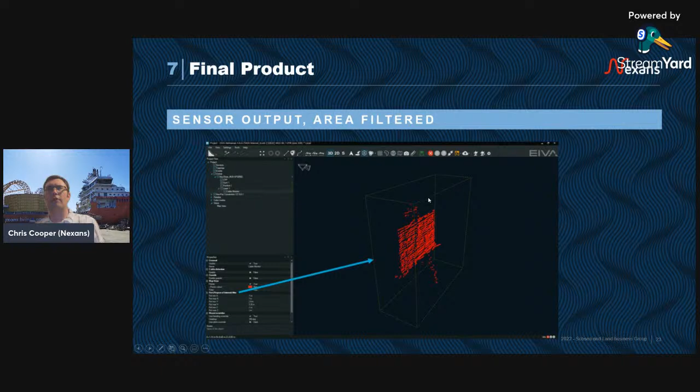Again you'll see the familiar EIVA software here. This is where the clever stuff starts to happen. We've started to separate the points associated with the cable from the points associated with the vessel, or the whiteboard in this case. That gives us these outputs, which can then be turned into a bullseye view, for example.

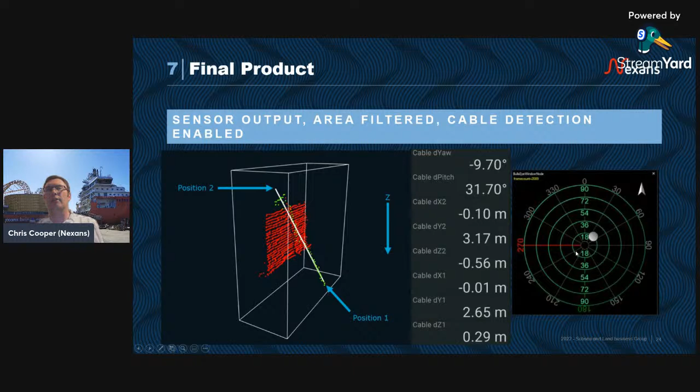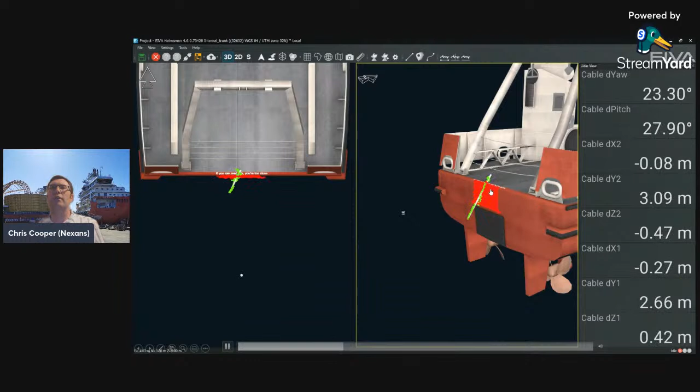Obviously the key is the input to the calculations. Just to give an idea, this was again in the office, but with a mocked up vessel stern, just to show how this would work with the cable moving around, and do a good test there.

Just for any startup, and obviously if we're doing any repair work where we need to move cable out using the A-frame.

So this is the clever stuff. The cable has to be separated from the rest, the noise from the ship, and this is basically done using these machine learning algorithms.

The Gaussian mixture model then fits the K clusters in the data, and from that evaluates which Gaussian each point came from. The Gaussians are estimated through an expectation maximization algorithm, an iterative method that finds local maximum likelihood estimates.

This basically turned out to be a very good fit for noisy data, where it can be assumed that each point is independent and identically distributed.

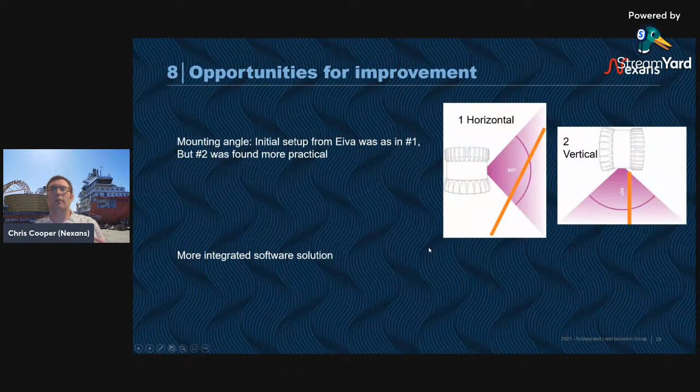We'd like to see a more integrated software solution. There's a lot of different areas to have values put in and checked off, and it's not one command area, but at the same time the guys and girls out there are clever people, so they should manage, and it's a pretty normal situation for navigation software.

And then the last thing is that we see that with bundled cables, we might have some issues, so we might need to do further testing and updates for them.

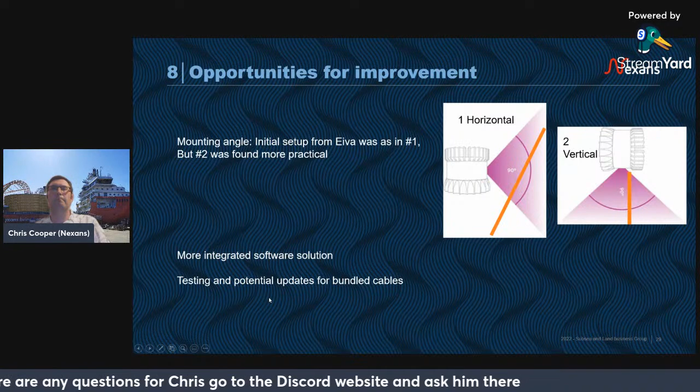That was what I had. I hope it was interesting and a bit different, and I managed to explain a relatively random bit of technology well enough that people outside the cable industry understood what I was wittering on about. But yeah, if you've got any questions, I'd be glad to hear.

I thought that was very interesting, Chris. Thank you very much. One question, I got a couple of questions actually. A bit quiet on Discord, but what was the driver for this? I'm not sure if you alluded to that at the start, but what was the driver to get this piece of kit working for you?

We saw there were two things. We saw that definitely the equipment we used for this initially, up until this point, was basically becoming obsolete. This was, as I tried to describe, a large kind of steel cage structure that fits around the cable as it exits the lay vessel, and then this has a sensor which is physically in contact with the cable and registers the angle from vertical that the cable is at.

Okay, so a laser can only go so far and through certain mediums. So is this possible to use for touchdown monitoring, for example, or is that something maybe a pipe dream, or is it actually viable? I think this technology is absolutely for the above surface application.